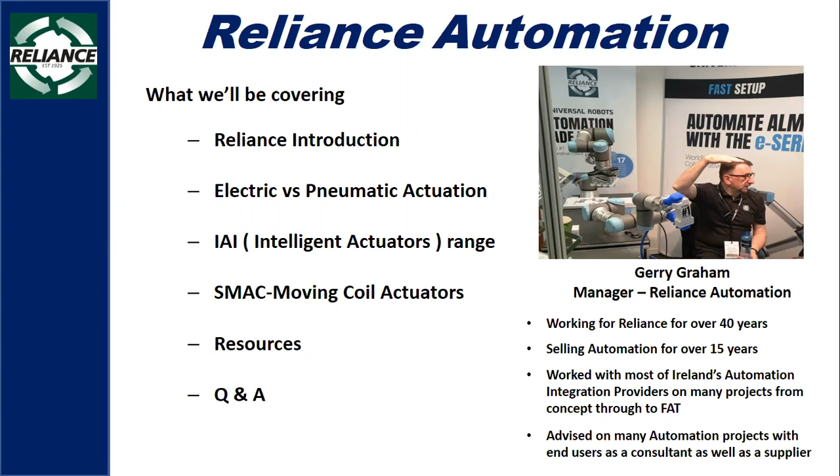We're Ireland's largest technical distributor. We operate predominantly in certain Irish markets like food production, pharmaceutical, biomedical, the medical device market, manufacturing, and transport.

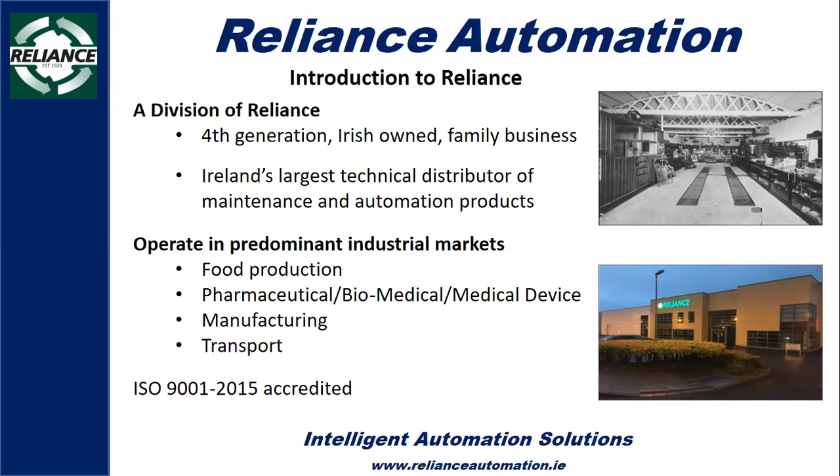We're also ISO 9001 accredited. We have three branches in Ireland: one in Cork, which is our head office, a Dublin branch, and a Limerick branch.

We have 45 full-time staff, 8 external sales engineers, and 40,000 square foot of warehousing. But the most important thing to emphasize here is we are a distributor, not an integrator.

We have formed partnerships with approximately 20 integrators from all over the country, which allows us to deliver complete solutions, but we will never integrate ourselves.

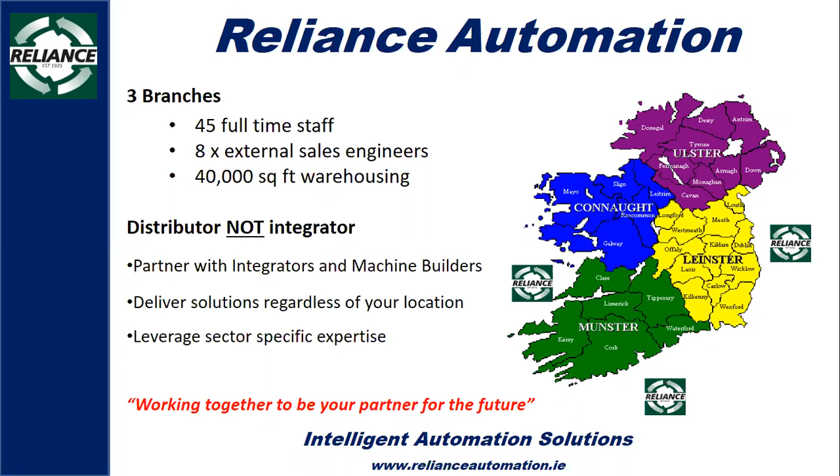Programmable electric actuators have been available for decades. We all know this, and we all know they're out there. But the perception is that they're very expensive, and always will be.

However, their effective price has been steadily falling, and they're certainly more affordable now than they ever have been.

They come in many different shapes and sizes, and the range has been growing fast. They're now available at up to 3-meter strokes, both rod and rodless designs, and at higher speeds than pneumatics.

The sheer range is just astounding. The smallest available would fit entirely on your business card, while the largest can handle payloads of up to 160 kg.

They're being adopted into industry for three main reasons. Number one is the cost of providing compressed air. Number two is probably controllability of the unit itself.

And number three is because these pneumatic replacements are almost always maintenance free.

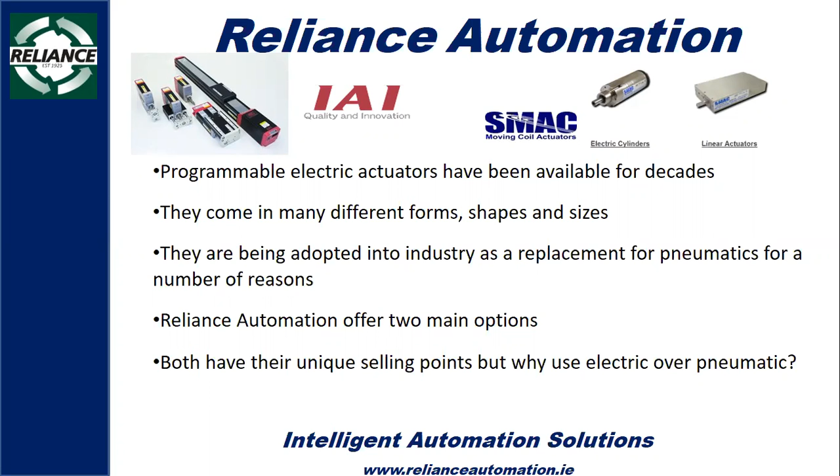The two offerings from Reliance in this area come from IAI and SMAC.

They share a lot of things in common, but they are very different types of technology, and we'll go through both in some detail. What they share in common is smooth operation, smart programming, and they're both quiet, fast, controllable, and very safe.

IAI are made in Japan only. They've been in business for over 40 years and have never made pneumatics. They are the major supplier of programmable pneumatic replacements in Japan and one of the leading suppliers in the United States too.

IAI have never made pneumatics. SMAC, Moving Coil Actuators, have been in business for 30 years. They're made in the US only and are one of the leading providers of moving coil actuators in the world, and they've never made pneumatics either.

Both have unique features, but before we go into that, let's take a look at the real cost of providing compressed air.

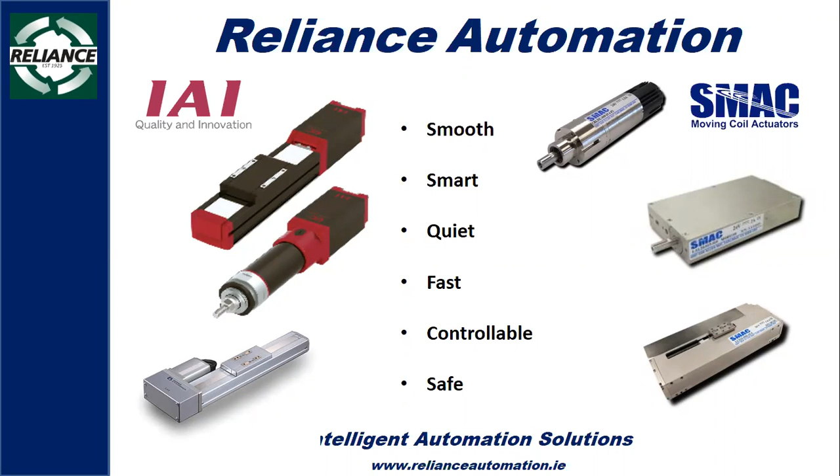I don't think anyone listening to this will be in any doubt that running large rotary screw compressors is an expensive business. They are often the largest single consumer of electrical power in industrial environments.

As you can see, there are huge inbuilt inefficiencies involved in the production of pneumatic air supply. When you compress air, it heats up. It also secretes water. These are unavoidable.

These two processes alone, compressing and then drying and cooling the air, account for half the energy consumption. Of course, it must then be filtered and stored for transportation to the air cylinder for use.

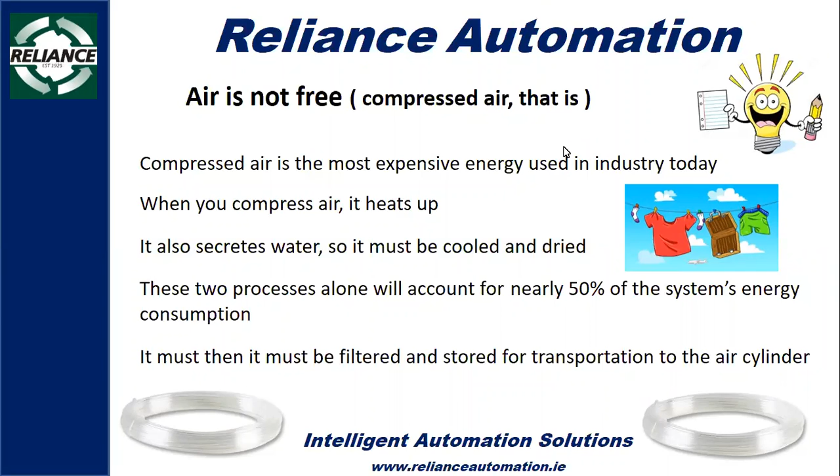Let's take a look at how expensive these units are to operate. Here's a recent example from an energy survey done by Reliance. It shows how expensive this machine is to operate. This one was fitted with a 250 kilowatt motor and was one of 3 units, all the same size, but the plant could run on 2.

Let's assume for the sake of simplicity that these units are 95% efficient, run 16 hours a day, 5.5 days a week, 50 weeks per year. Let's also assume that they're always running under full load. I know this is a little unrealistic, but we're doing this for simplicity of calculation. We're also assuming that the electrical costs are 14 cents per kilowatt hour.

How much do you reckon it would cost to run this in electrical power alone, forgetting about maintenance or any other costs involved? The answer is just over 162,000 euro. That can be surprising, but for most facility managers who are aware of this, it won't be any surprise. And that's assuming, by the way, that's just producing the compressed air, with no other inefficiencies.

If you have a small leak in a pneumatic system, if you can hear that small leak, then this leak alone will cost you 600 euro per year in electrical costs. A pinprick sized hole, which you will not be able to hear, could cost you nearly 500.

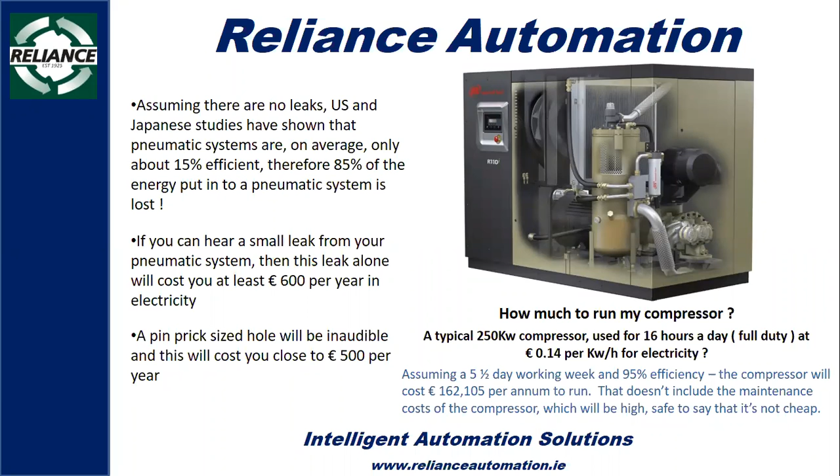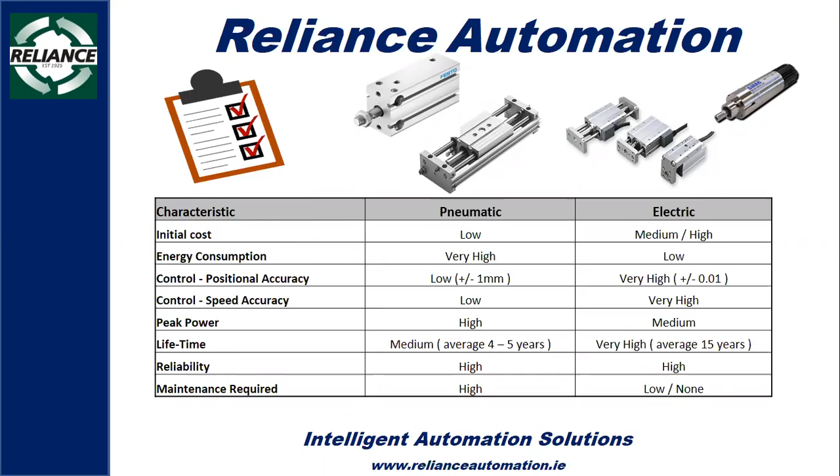Initial cost, of course, is higher for these electric replacements. As a general rule, electric actuators are probably at least twice the price of their pneumatic counterparts, maybe even more, depending on many factors. However, their initial cost can be outweighed by their cost of ownership throughout their lifetime.

The electric cylinder is far more efficient. It produces its power at the point it's being used, and more importantly, only when it's being used. They can be spec'd with sub-micron positional accuracy, although 20, 10, and 5 microns are more standard. They can also be spec'd with higher speeds than pneumatic cylinders. Size for size though, generally speaking, electric cylinders can't match pneumatic counterparts for peak power, although most applications probably don't use the full power of the pneumatic cylinder.

Importantly, it must also be stressed that the accelerations and decelerations can be programmed separately to allow more gentle movements, making the actuator easier on other processes and mechanical components.

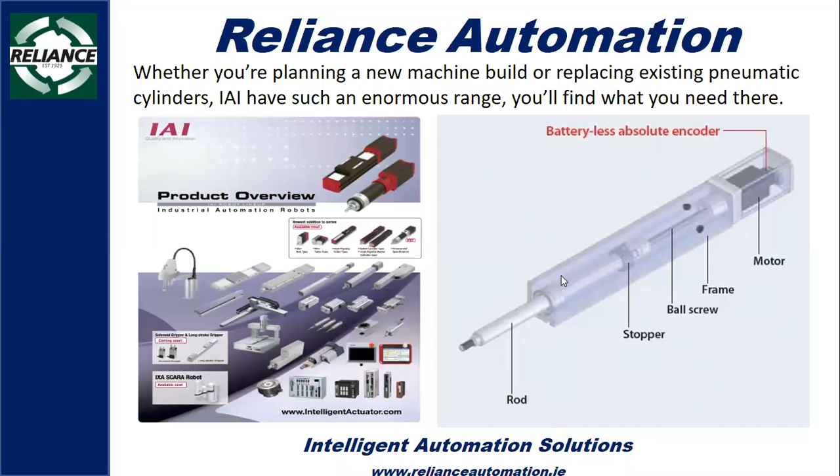We're just going to show you a video here that was taken at IREX this year. IAI set up at IREX a conveyor system. This conveyor system does not contain any pneumatics whatsoever, it is all electric. We'll just go through the applications that are on this.

Each one of these yellow pallets being moved around weighs 7.5 kgs. The first application here is a slider unit. On the left, it's shown if this was done by pneumatics, you'd have hard acceleration, hard deceleration, and a cycle time of 2.4 seconds, because the high speed it reaches in the center of its stroke is not as high as can be done with electrical. Here we have the electrical, smooth acceleration, smooth deceleration, making the components on the conveyor under less stress. But more importantly, it can be done in a faster time.

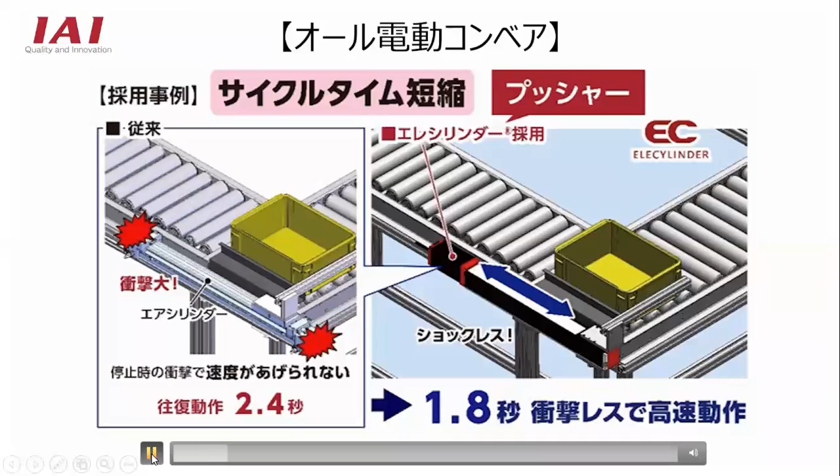Here's the slider unit here, you'll see this in the video just as we run it. So there's the slider unit, there's the carriage, there's the pusher. It pushes along.

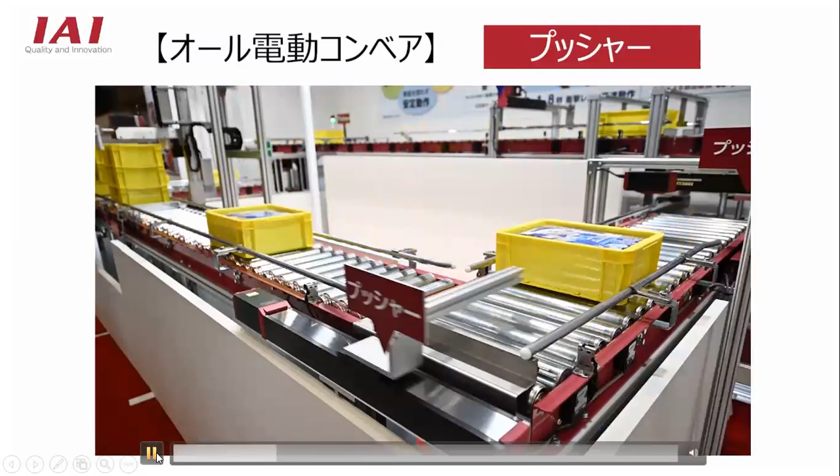The second application is a little gate, opening the gate and closing the gate. Here it is, close. And there it just opens. Just pause there for a second. Here's the IAI EleCylinder unit, reverse motor, the rod connected here. So very, very simple gate application to allow the pallets onto both sides.

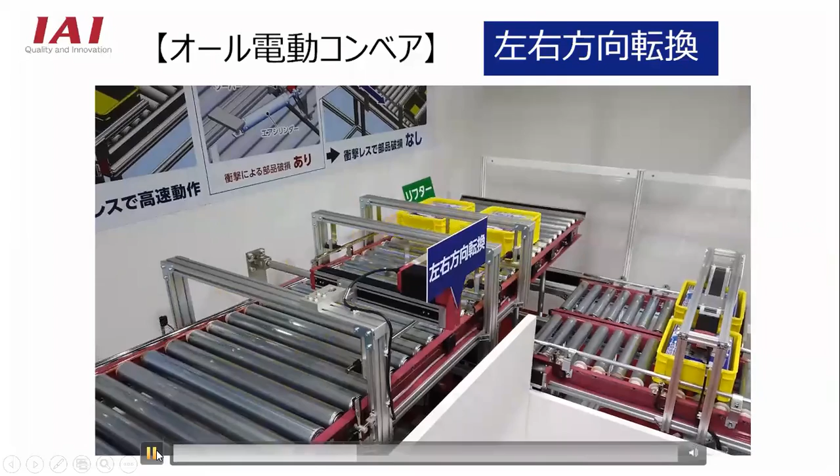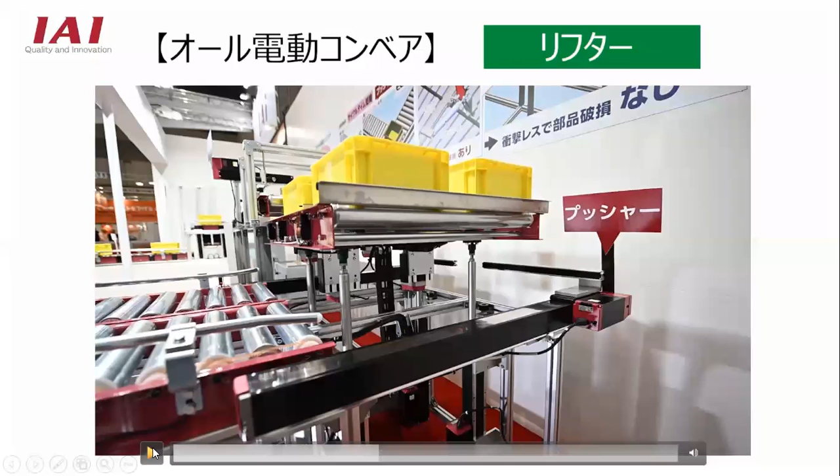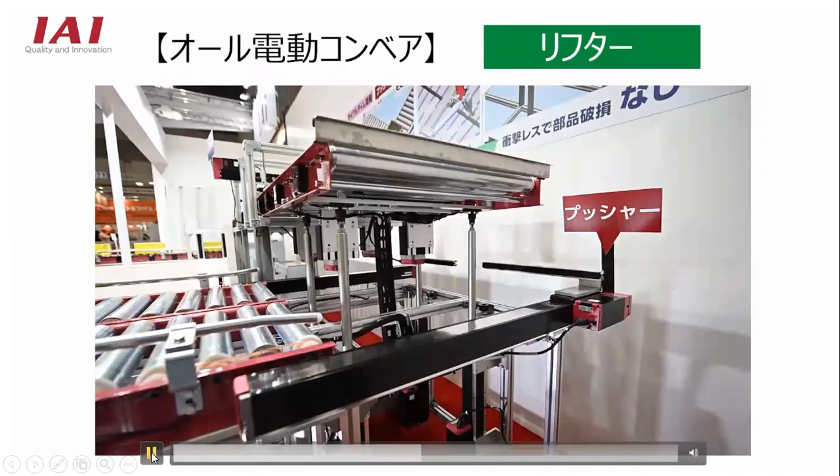This is the third application, it's a lift, and there's four EleCylinders here, though they're kind of hard to see. This one here in this corner is the easiest to see, so again it's a reverse motor rod type. So there's 1, 2, 3, 4 units, and the total they're lifting here is about 40 kg, but they're doing it in unison. You can see the slider here again, our first application. There you get a better view of the lift units.

Now, the next application on this conveyor system that IAI set up is a little bit more complex. And again, sorry about this. There we go.

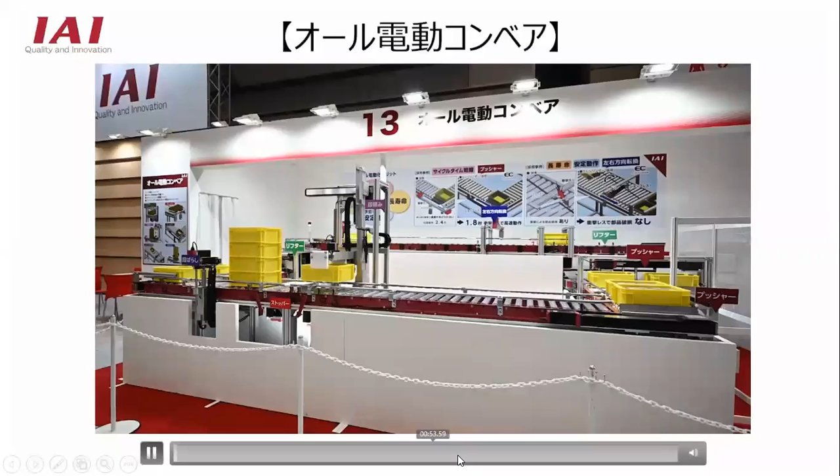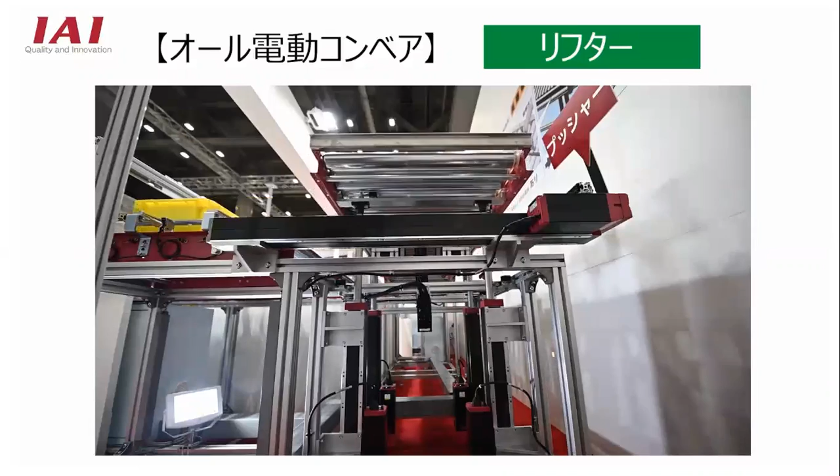The next application is a little bit more complex. You've got 4 pallets that have been stacked, and what this needs to do is move the bottom stack. So if I pause this here a second - these 2 units clamp the three and then lift it. The lifting is done here. These ones down here are not EleCylinders, they're larger brothers, which we'll tell you about in a little while. They're Robo cylinders. These lift up the 3 pallets, and the slider then just pushes the bottom one away to destack them. See it there again.

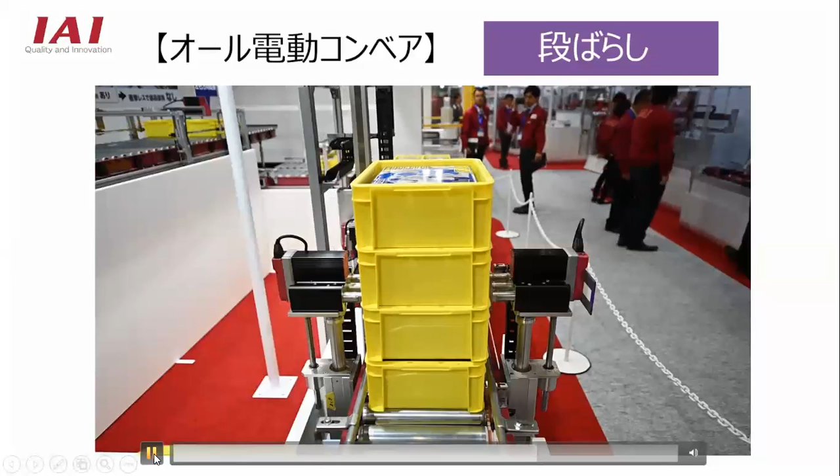Drops, up, clamps, and repeats the process. And here you see the pallets being actually stacked after the first process has pushed them down.

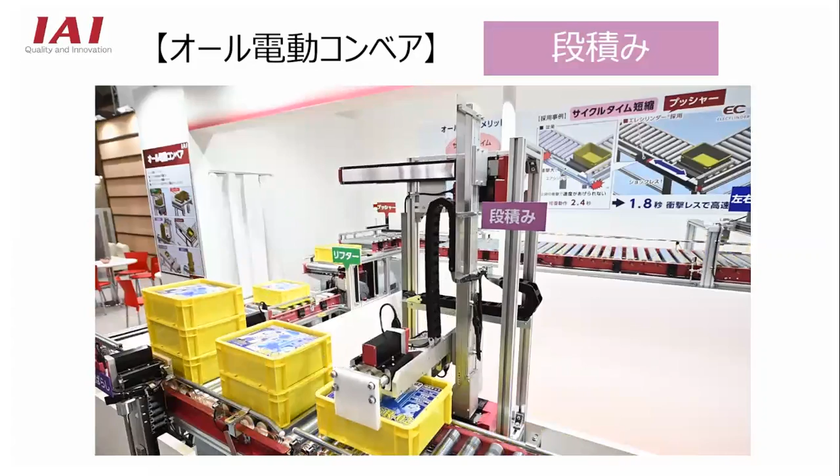I was trying to emphasize there that the I/O system for the control of the IAI range is completely compatible with pneumatics control systems. The PLC controlling that whole conveyor system would not know whether it's pneumatics or electric cylinders it was controlling. They're exactly the same. So the IAI series can support the 2-position 2 signal as well as the 3-position 2 signal modes. And most of the units also support the 2-position 1 signal mode too.

Effectively this means that replacing a pneumatic cylinder with an IAI unit can be completely invisible to the PLC.

Before I leave this slide, I should give a rough comparison because people are always interested in what price these things are. So let's take a rod cylinder, 250 mil stroke, replacing a 32 bore pneumatic cylinder. I'm not 100% sure how much this will cost with pneumatics, but I'm guessing around 200, 220 euro. For the equivalent unit from an Elecylinder range, the cost would be 492 euro for the batteryless absolute encoder. Remember, this controller is built in. So that's just a price comparison.

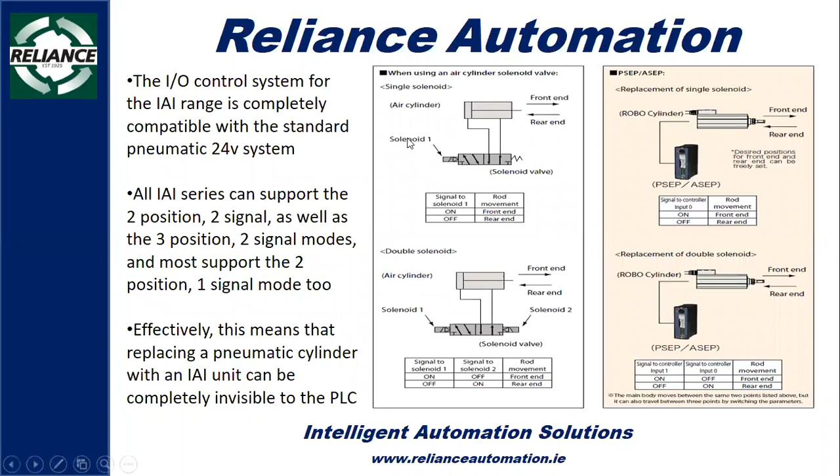Now here we see a slide showing the main characteristics of the Elecylinder. Like I said, they're fast and easy to program. The reason they're fast and easy to program is there's only 5 parameters to set. They can be programmed with either a teaching pendant or a PC program. Those 5 parameters are the home position, the away position - it'll come from the factory with the home position at 0 and the away position at its full stroke length, but you can change those. You can also change the acceleration, deceleration, and velocity of each movement.

The Elecylinders have a built-in controller. The controller is inside the motor unit itself, and they're only hardwired discrete I/O control. That's the only way you can control these. They are literally meant to replace pneumatics. They're maintenance-free. They have a stable velocity even at slow speeds.

But the one thing I should mention is their push mode. Most of the time, these units would be operating in position mode, so they move to a designated position as set in the program. If it can't reach that position through a blockage or something, it'll trigger an alarm. But it can also operate to that position in push mode. In push mode, it tries to reach the position, but if it's prevented from doing so, it will send a position end signal and move to the next operation. The user can set the percentage of the motor power the unit may use to overcome this obstacle, so this can be useful to find things. The push mode in the Elecylinder is only available in one direction.

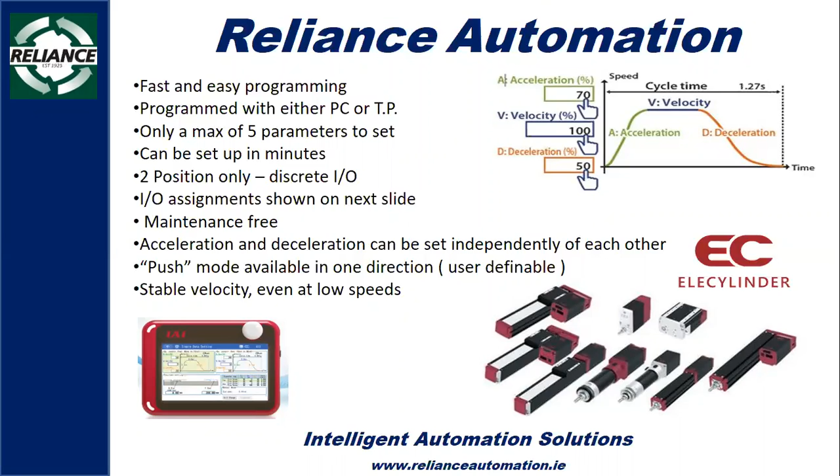Now I mentioned that the Elecylinder is I/O only, so it comes with a cable, pigtails. So you can see here the assignments of those I/Os - the backward and forward positions, the alarm, etc. But the main thing to note here is that you have 2 options available depending on the safety category you wish to meet. You can have one 24-volt line for both motor and power, or you can have these 2 separated, as in B1 and A2 here. It really depends on which safety category you want to use and how you want to implement these, but both options are available.

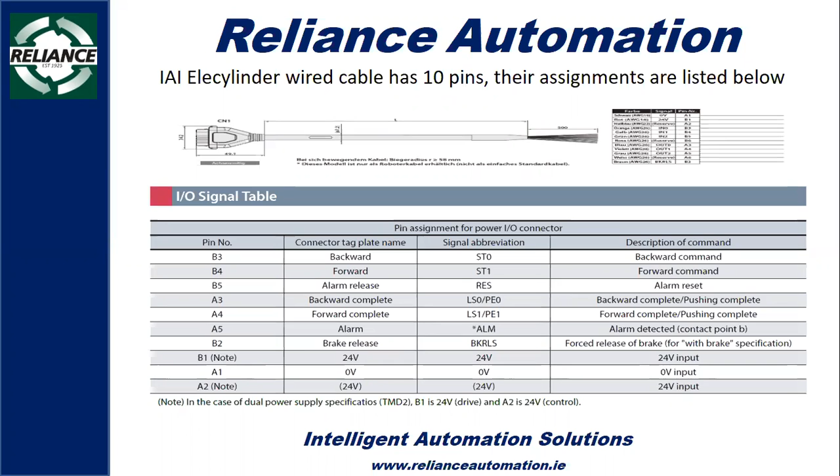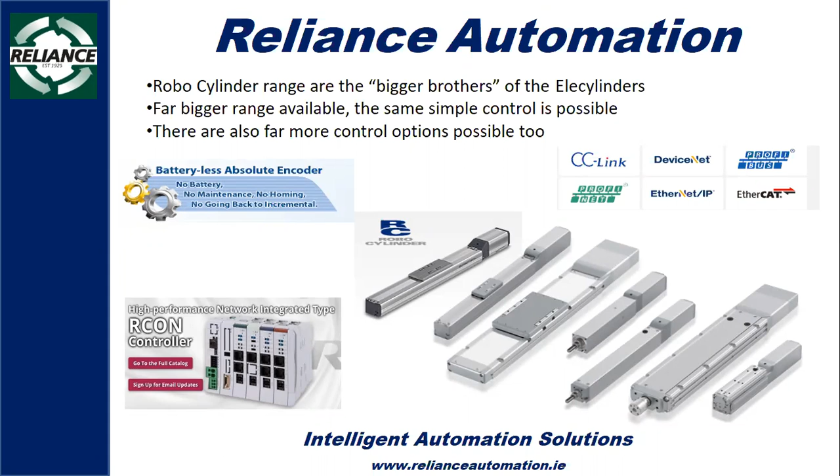I mentioned the bigger brothers of the Elecylinders are the Robo cylinders. Generally speaking, there's a wider range available, and they all have batteryless absolute encoders as standard. They're an optional extra on the Elecylinders, but they come as standard here. They all have high resolution optical encoders offering 20, 10, or 5 micron repeatability. They're all maintenance free. They also have a built-in controller option, but it's a very different type of built-in controller because it can't operate on I/O. It can only operate on, as you can see here, these field bus options. You can have external controllers, single type or multiple type - we'll go through that in a second. But it's also important to note that these are heavier duty. They can handle higher payloads, higher speeds, and they can work on 24 volt or 48 volt. I'll explain more about that in a minute, but you're always only supplying 24 volts to the controller.

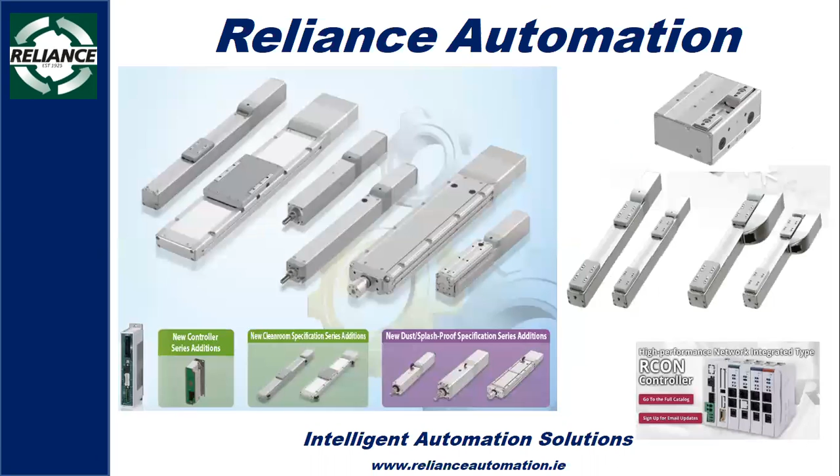Now a little bit more about the Robo cylinder. They're available in the rod type as well as a slider and a wide slider type. You've got clean room options, splash proof options, grippers - there's a massive range available.

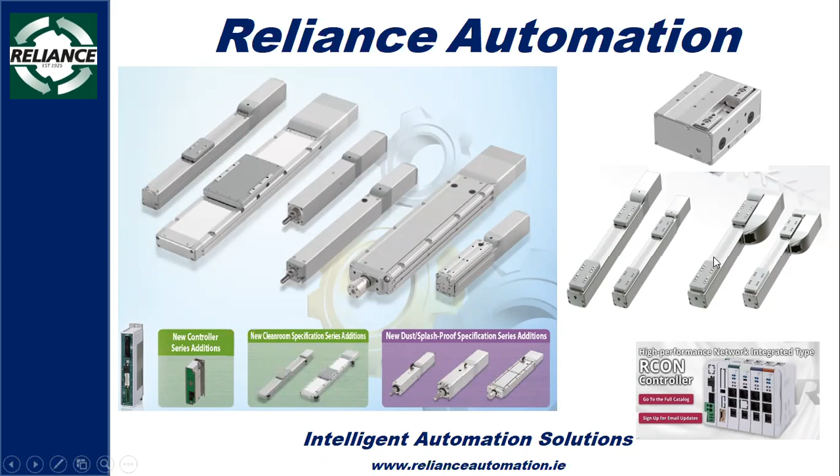The types of controllers you can get: you can have the solenoid I/O type to replace pneumatics as an external controller, you can have pulse train control, or you can have all those field bus options I mentioned earlier. You can also have multi-axis controllers, which we'll go through a little bit more in a minute.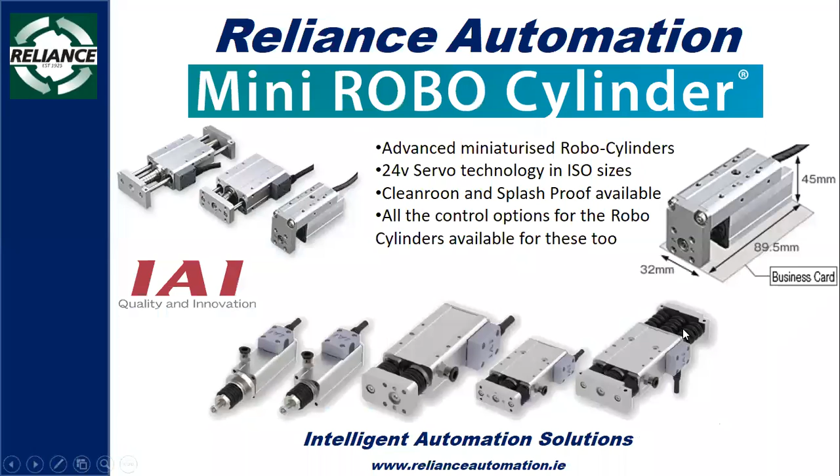There's also the mini Robo cylinder. These are advanced miniaturized Robo cylinders with 24-volt servo technology, and they also come in ISO sizes. You might remember I mentioned that you can have an actuator small enough to fit on your business card. Well, there she is - this is the table type, and that's a typical business card completely fitting on that card. That's how small they can be.

Here you can see they also come in splash proof and clean room type. These are a port for vacuum, so if they're used in a clean room environment, you can literally vacuum away any possibility of contamination.

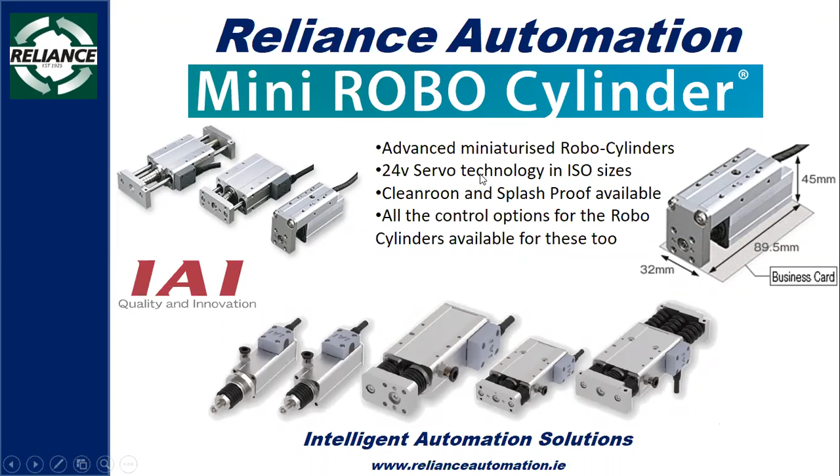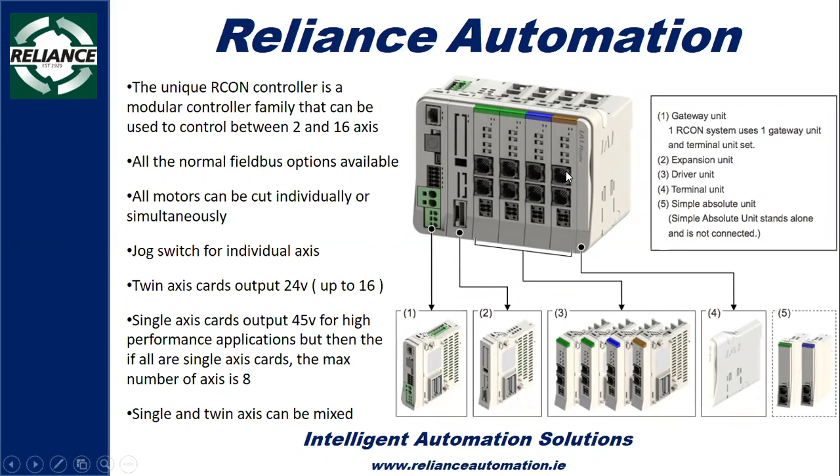You can mix the 2-port cards with the 1-port card on the one controller - you can have any control mixture you want. These controllers are relatively new to the market, and we've only sold a couple of them so far, but they are very popular because the amount of control space in your control panel they save is huge. If you have all dual cards, you can have up to 16 axes in the one unit that will literally fit in your hand.

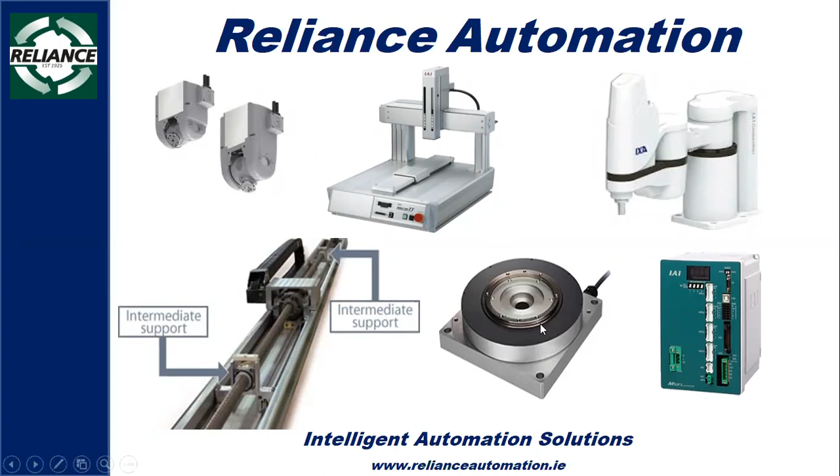That's the IAI. Now we move on to the SMAC units. SMAC moving coil actuators - well, they're very different to the IAI units. They have no ball screws, okay? And apart from the linear guides, their drive is contactless, so their only contact is the linear guides. They have absolutely no drive friction whatsoever.

We'll get into this more a bit later, but in almost all applications, a SMAC unit can tell when it's performed what it was programmed to do properly, or when something has gone wrong. And most of the time, it can tell what went wrong and report the condition back to the PLC in real time. That's what gives these units the ability to perform the tasks and verify their quality at the same time.

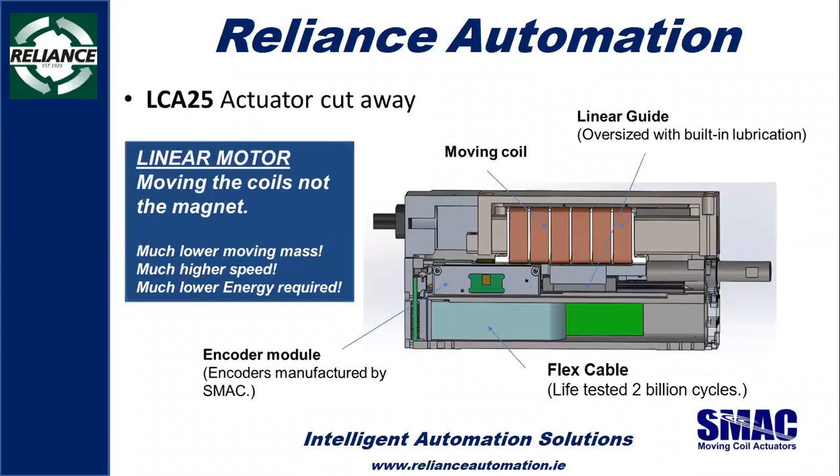They're available with 3 different levels of encoder. 5 micron repeatability is standard. For more accurate positioning, there's a 1 micron and even a 1/10 of a micron encoder available. So that's the linear rod type.

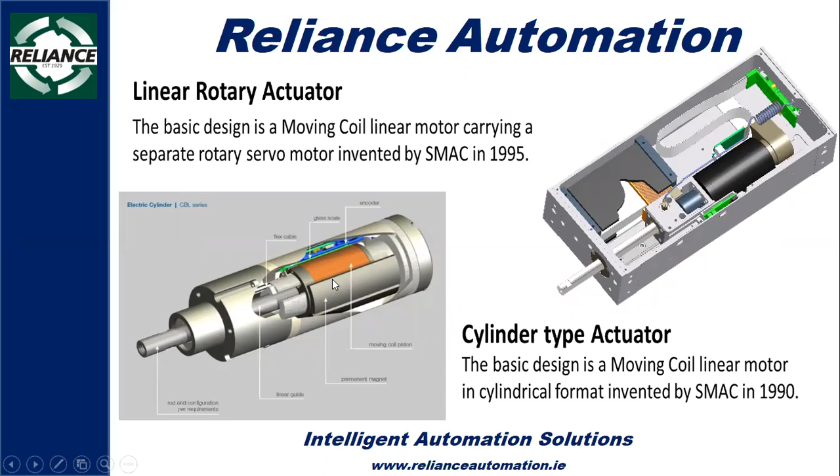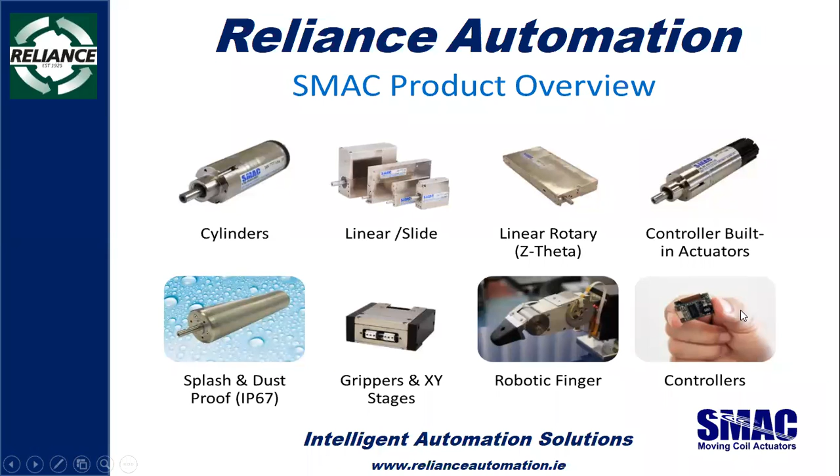They react just like they use them for testing - they react just like a human finger. They've used them for testing the likes of Apple screens and button testing, because they push a button the same way a human pushes a button. There's also various different controller types, which we'll go into in a slide or two.

But the key technical advantages of the SMAC units: well, they have a much longer cycle life. As we said, their cycle life is measured in millions of cycles. When SMAC get involved and spec the unit properly, and they do the testing and they're confident that it's properly being used, they will guarantee the units for 100 million cycles.

The main reason they can do that kind of thing is the drive system is contactless. They're actually very, very fast, of course - 24 to 30 hertz are possible, and that's even growing. We'll get into that in a minute when we show you a video. But one of the other reasons they can do things so fast is their response time of the control system. It can be sub-millisecond, sub-1,000th of a second - that can be the response time.

Like all electric units, they're extremely efficient. And as I said already, they're fully programmable in force as well as velocity and position. They also have a soft land feature - this is very useful, and we'll show you this in more detail in some of the videos. But one of the main things here is they're fully accountable: live process data is sent back to the PLC, so you know what they're doing when they're doing it. And of course, they're all silent.

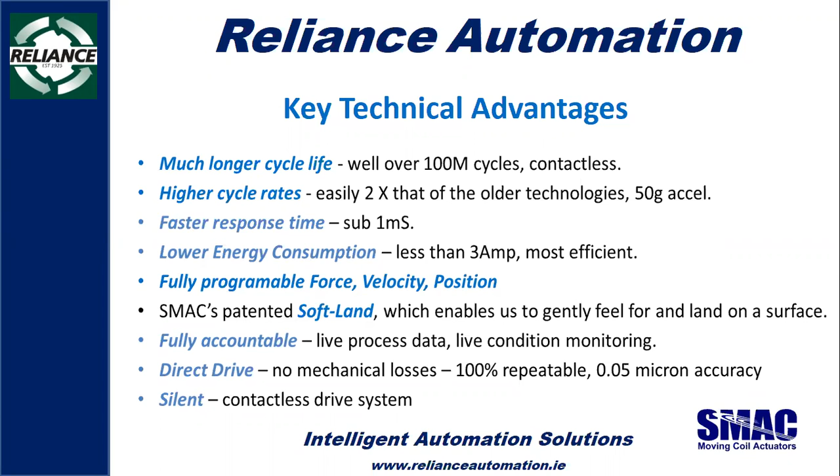Here you can see the normal type table comparing the CBL units, the cylindrical units, to their pneumatic counterparts. No need to go into all this - most of this is just showing you a lot of what I've already told you. Just to emphasize the point, they're maintenance free, and the total cost of ownership of these things when compared to pneumatics can be much less than pneumatics.

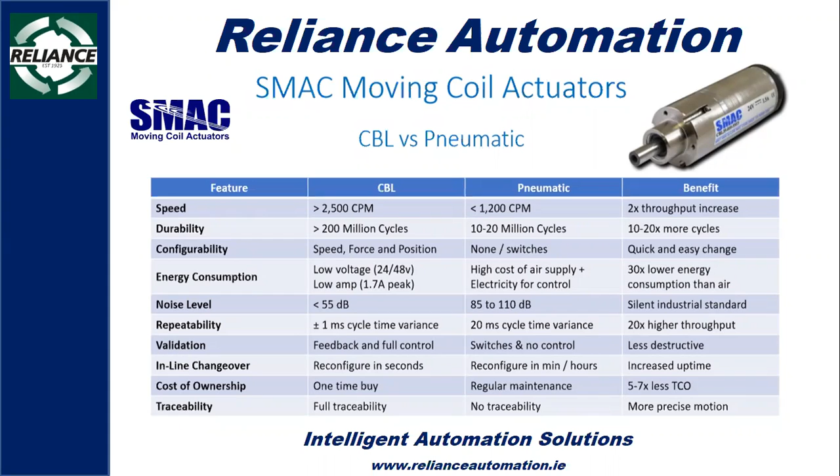The newer products coming out from the SMAC range, we mentioned the LAR and LAL, which are the linear rotary and linear units. Well, replace the A with a B, and you've got the LBL and LBR. These are the latest iterations for these units from SMAC.

They are actually lower in cost than the ones they're replacing. They're available with strokes of 25 mil to 200 mil, and they are stackable. I'll tell you what stackable means in a minute.

The next photograph here is the CTL series. The CTL are electric cylinders. Again, they're lower in price than the ones they are replacing.

Give you an example: a CTL 50-10, which is a 10 mil stroke, 5 micron encoder, would cost around €550. Controller will be additional to that, depending on what type of spec you wanted on the controller. You can have the IO type, you can have the field bus type, and they're all different prices. But it could be anything from 275 to €500, that kind of price range.

So I said the first ones there were stackable. Here's a photograph of a stack, which means you can quite literally stack these beside each other. They can work as a team, controlled by a master controller, and it's a very cost-effective way for multi-axis applications.

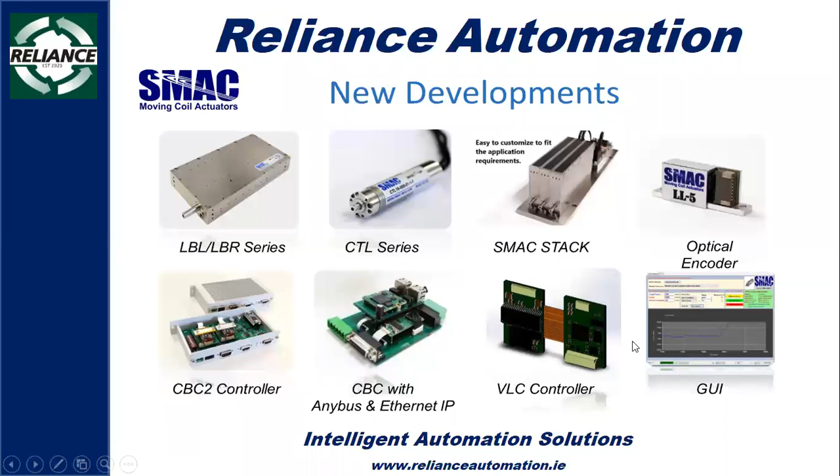So, typical applications for these SMAC units. Well, one of the main ones would be pick and place. Pick and place applications, they're ideal for these because they're super repeatable, fast, and they can rotate as well as lift and drop at the same time.

They are often deployed at the end of a SCARA robot or a 6-axis robot in this role too. They're also ideal for assembly work, as they can detect surfaces as well as give feedback on the work being done. Rejecting and diverting is often needed in industry, and it's hard to find a simpler solution than the SMAC units, and we have a great video to show you that coming up here.

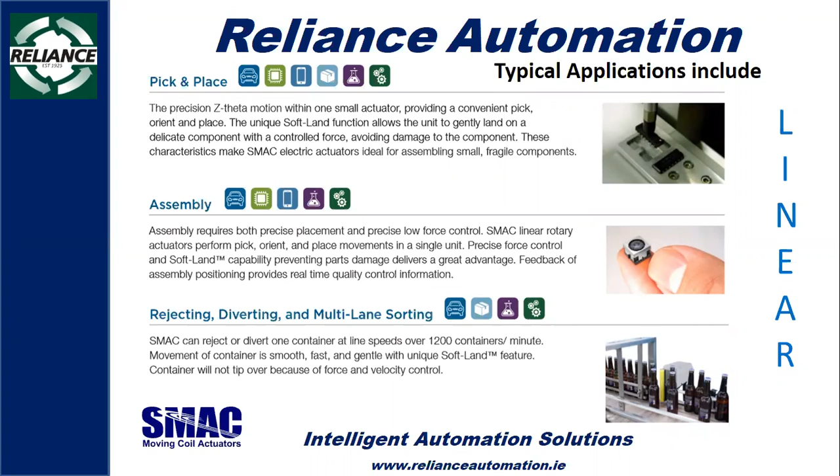Okay, this is a video that was taken in a Coca-Cola plant. The Coca-Cola plant is in the UK, and this bottle line is running at 800 bottles per minute.

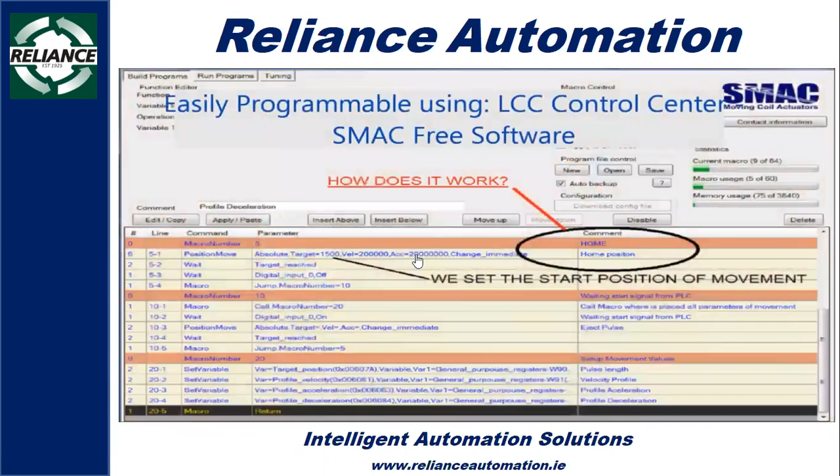Okay, these bottles need to be ejected one at a time without interfering. Oops, I'm going to do that again. Sorry about this.

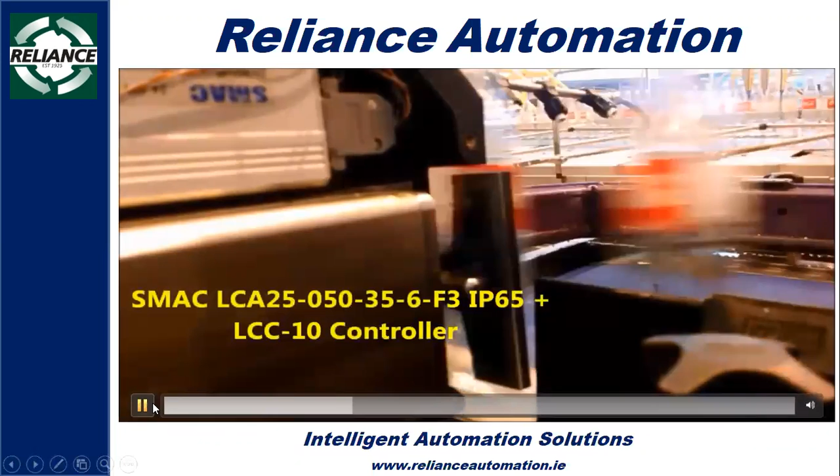Without interfering with the bottle in front or behind. And here we see exactly what's happening from behind in slow motion. Here is the body of the actuator. There's the rod, there's the pad that pushes the bottle, and there's the controller above it. And here's what it's doing in slow motion.

Okay, here's a sample of the programming that's involved. And there again in slow motion is exactly what it's doing.

So how is it doing it? Well, it's controlling the motion profile of the unit. As well as controlling the motion profile, it means it accelerates through the bottle as it pushes it out, controlling the movement. But it can also, what also helps it do this is its response time.

You might think this is the fastest way to reject and sort, but SMAC actuators have been successfully applied in ejecting and diverting applications in units that run at 2.5 times the speed, 2,000 parts per minute. They're amazing.

Other applications include filling, where because of their high repeatability, the fill amount is very precisely controlled. So there's no need to overfill to avoid underfilling, as is often the case when it's done pneumatically.

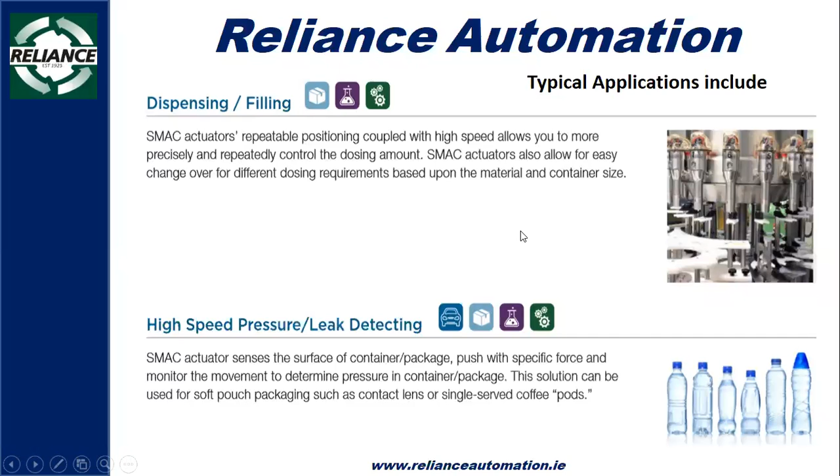Also, measuring. Because of the feedback from these devices, you can use them to measure and gauge. You can use them at the end of a tool, and as you move along the profile of something, they report back to the PLC exactly where the rod is, which can be used for gauging and measurement inspections.

They also have smart screw driving capability, capping, and thread checking. These are all very similar because they use the linear rotary unit. I'm going to show you a video on this. Remember, the video is on the smart screwdriver, but capping and thread checking are very similar, and there are GUIs for all three of these.

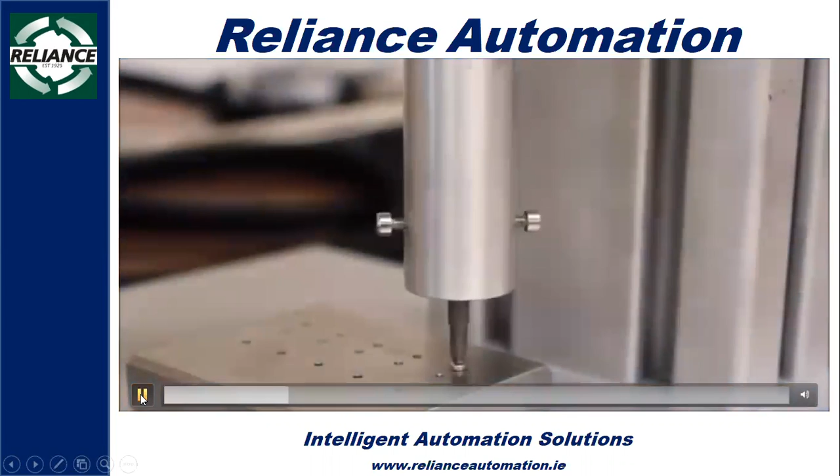So here we have the smart screwdriver. Again, this sometimes happens, we're going to go through that again. Now it's going to show you the 5 stages of what it did, in slow motion. Okay, let's go through it.

It fast approaches and then finds the surface with a soft land capability. In other words, this could be a mil higher or a mil lower, and it will still detect it. Again, if I just go back a small bit here, it detects it.

Then it moves counterclockwise to make sure the unit is not cross-threaded. Then it rotates. A point to note here is it does all this in real time. If I go back to the start of the video, remember it's doing all those things in real time, this fast.